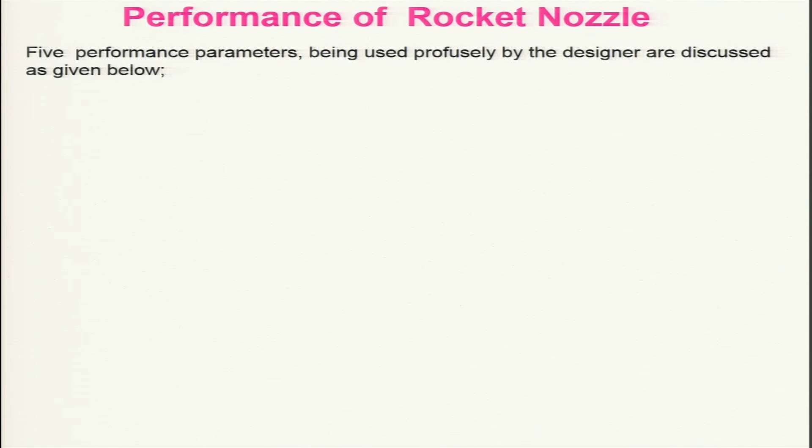Let us look at the performance of the rocket nozzles, because we need to see how good it is as compared to the ideal one. For that, 5 performance parameters are generally used by the designer: isentropic nozzle efficiency, discharge coefficient, mass flow coefficient, thrust coefficient effectiveness, and combustion efficiency.

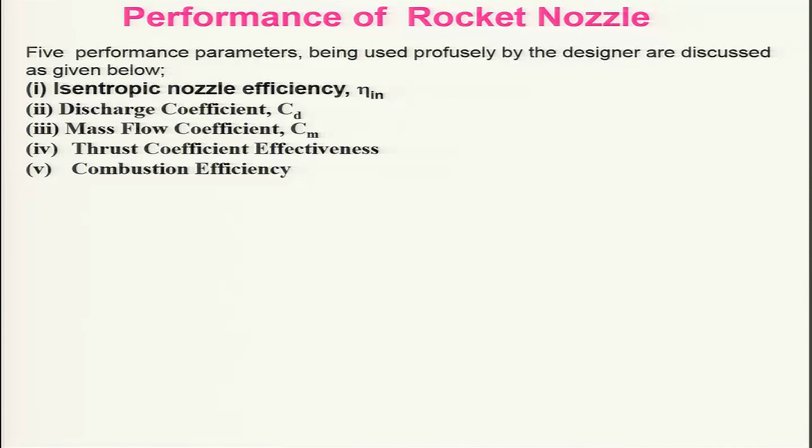Let us look at the expansion process in a TS diagram. When expansion is occurring in a nozzle, this is the ideal one and this is the actual one. You can see that this is the change in entropy, corresponding to actual. Therefore, we can define the nozzle efficiency as HT2 minus HE, the actual one for the pressure ratio PT2 by PE, divided by HT2 minus HES, the ideal corresponding enthalpy.

If I assume Cp to be constant, I can write down the isentropic efficiency as TT2 minus TE divided by TT2 minus TES. This is basically VE square divided by 2 over VES square divided by 2, and this is nothing but your isentropic efficiency.

This isentropic efficiency, as I told, I can write as VE square divided by 2, and taking Cp as constant, if I take TT2 out of the bracket, I will get Cp TT2 into 1 minus TES by TT2. Since this is isentropic flow, we can express that in terms of pressure ratio PE divided by PT2 to the power gamma minus 1 divided by gamma, and in place of Cp I can write gamma R divided by gamma minus 1, times TT2.

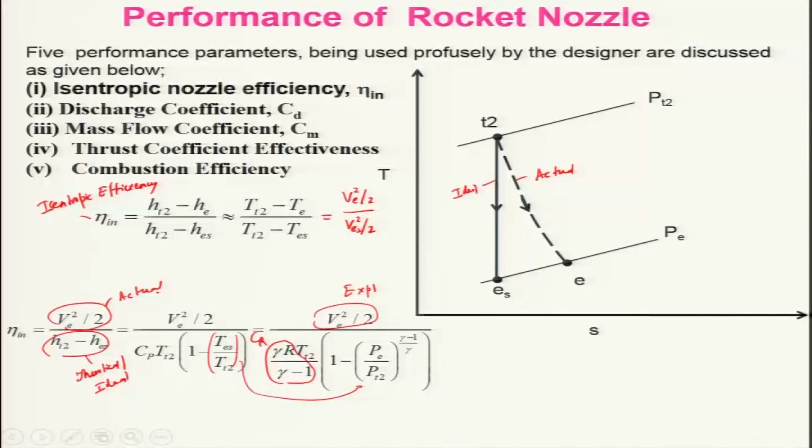From this I can get the actual value very easily from experiment, and I can calculate the theoretical one provided I know the pressure ratio PT2 by PE, the combustion chamber temperature TT2, and gamma. So this is the theoretical or ideal one, and this is your actual one, and these values will vary from about 0.9 to 0.98.

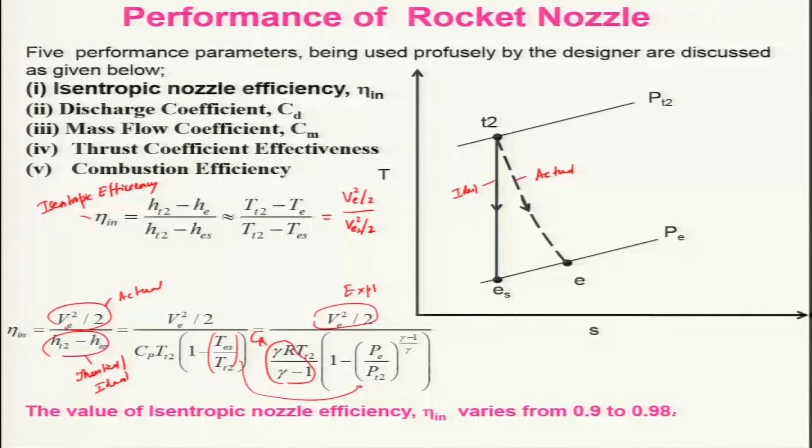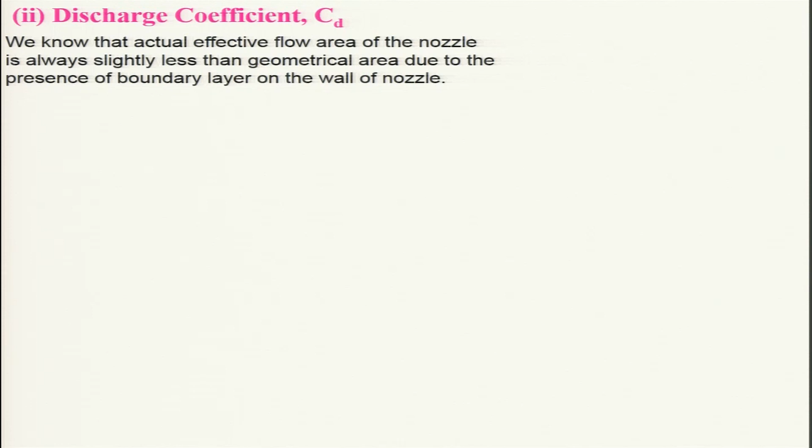Let us now look at discharge coefficient, which basically comes out due to the boundary layer effect and other things. The actual effective flow area of the nozzle is always slightly less than the geometric area due to the presence of boundary layer on the wall of the nozzle. Therefore, we define discharge coefficient as the actual mass flow rate divided by the ideal mass flow rate.

For mass flow rate, I can write rho E AE VE, the actual mass flow rate, divided by rho ES AE VES, where A remains the same, corresponding to isentropic flow without any boundary layers. So I can write this in terms of TES and VE over TE and VES, and the root term I can write as VE by VES, which is basically the efficiency I have defined. The discharge coefficient Cd depends on the Reynolds number and PT2 by PE.

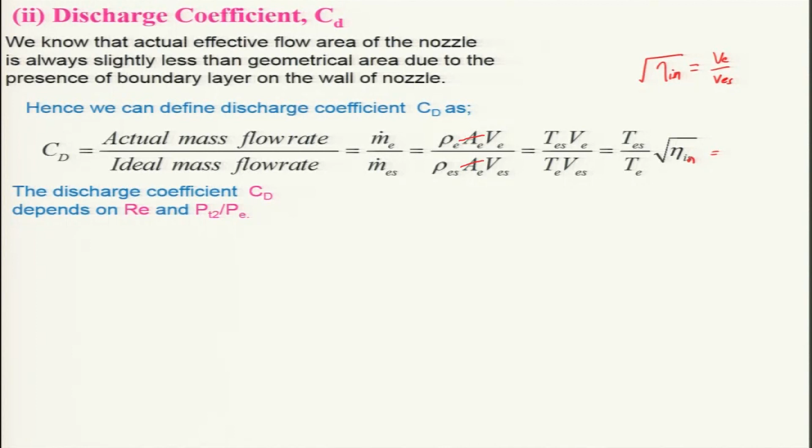If you plot Cd as a function of pressure ratio, you can see that in the subsonic flow it is not changing much due to the Venturi effects in the CD nozzle, and after that it goes on decreasing because VE will be different than VES because of losses, till it attains the choked flow condition.

And the mass flow coefficient C_m we have already defined, that is basically C_m is equal to m dot divided by P_c times A_t, and this you can get from the experiments and also theoretical values and find out how good it is. And mass flow coefficient, as I told, can be obtained from the experimental data and documented in the form of a design chart, so that it can be utilized and you can find out how good it is from the

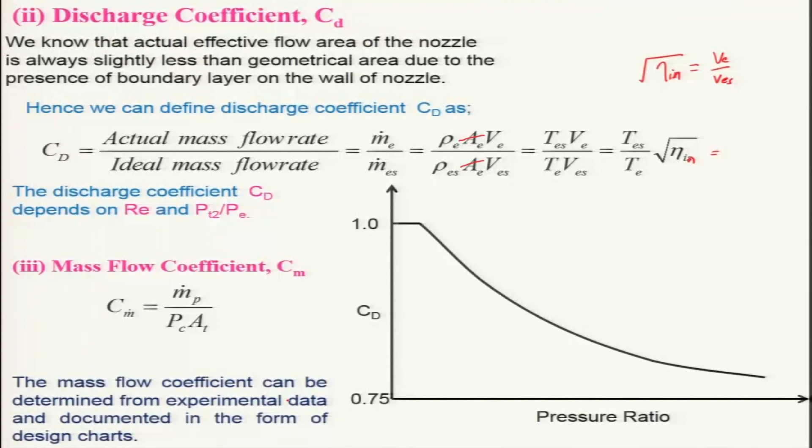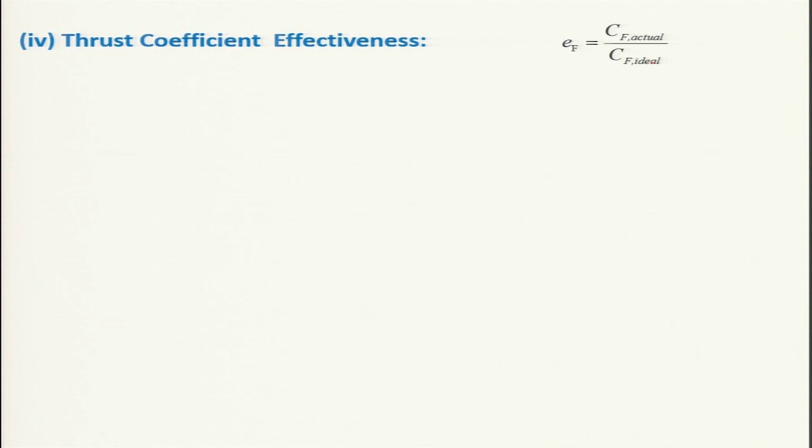ideal one. And we already discussed the thrust coefficient effectiveness, that is equal to the ratio of the actual thrust coefficient divided by the ideal thrust coefficient. The actual thrust coefficient you can find out from experiment by determining the thrust, the chamber pressure and the throat area, and the ideal one we can get from knowing the pressure ratio, gamma, area ratio and atmospheric pressure.

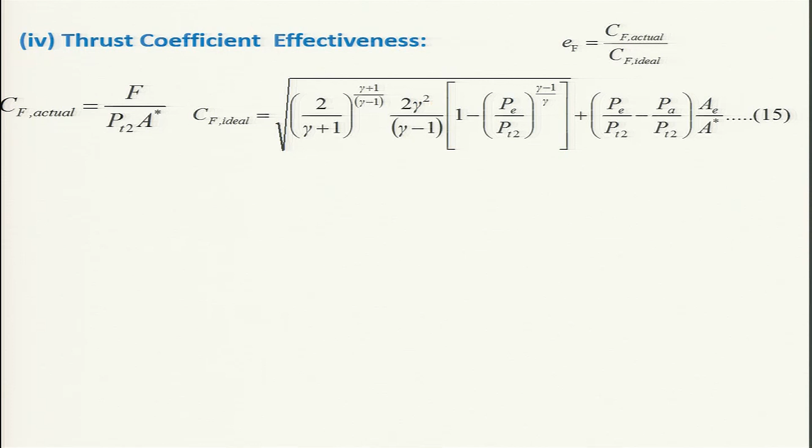We have already discussed this, and you can find that in actual practice the actual C_F is around 0.98 of the ideal value, but these values will vary; you can get E_F in the range of 0.92 to 0.98.

And another thing which is very much used, as I told earlier, is the combustion efficiency, which is the ratio of the actual characteristic velocity to the ideal characteristic velocity, and the actual characteristic velocity can be obtained by conducting an experiment measuring the mass flow rate of propellant, chamber pressure, and of course the throat area under choked condition.

And the ideal one you can estimate very easily by knowing the thrust chamber temperature, molecular weight, and also gamma, which you can get from equilibrium calculations. The combustion efficiency varies from around 0.95 to 0.99, and generally people always try to achieve a value of 0.99.

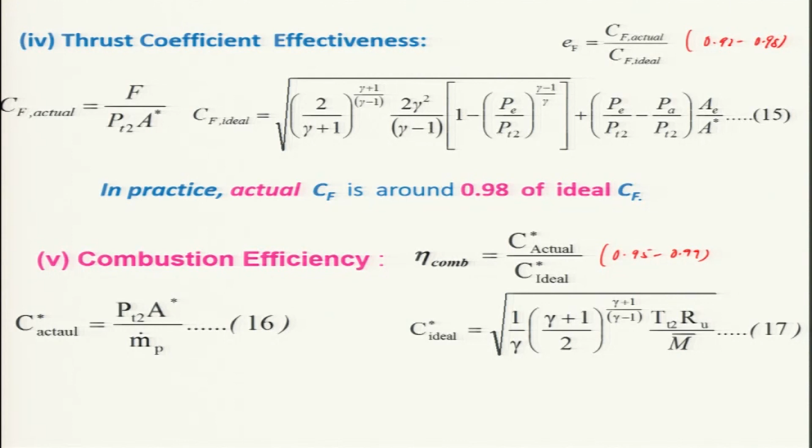So, these are the parameters which are used for evaluating the performance of the rocket nozzle engine, and we will be discussing how the exhaust nozzle velocity affects the flight performance of a rocket vehicle. A rocket vehicle is basically a vehicle propelled by a rocket engine. It can be a missile, a spacecraft, or any other vehicle which is propelled by the

rocket engine. So, when it is subjected to the thrust, it will be in motion provided it overcomes its own inertia, gravity, and several other forces acting on it. A question might come to your mind: what are the forces acting on a rocket vehicle during flight? Apart from the thrust exerted by the rocket nozzle, it will also experience the gravitational force, drag force, lift force, and even centrifugal and Coriolis forces, and the forces applied by the control surfaces.

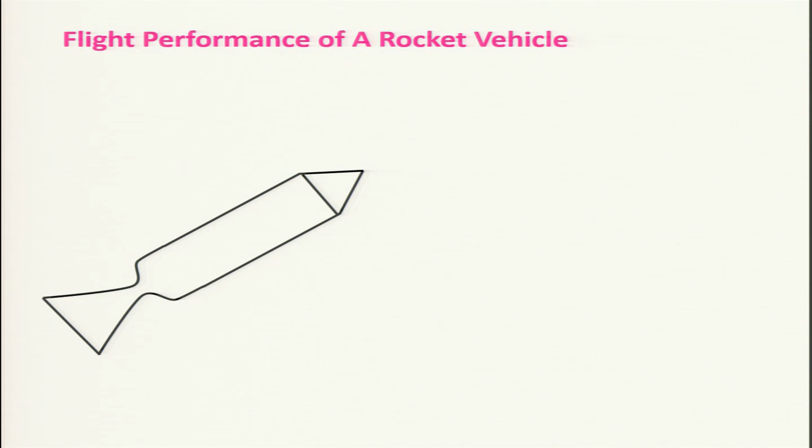And as a result, there will be moments, and the flight path of a rocket vehicle will be three-dimensional in nature. But for our present analysis, we will consider a two-dimensional plane in which a rocket engine is flying. Let us consider this is a rocket engine, and it is possible for it to fly in a two-dimensional or rectilinear plane provided no moment is acting on it. This is not realistic, but for simplicity we are considering it here.

And keep in mind that it has a center line passing through like that, making an angle theta here, and this is the CG of this rocket engine. And when the high pressure and high temperature gas from the burning of propellant is expanded through the nozzle, it will have a certain exit or exhaust velocity V_e, and it will produce

a thrust, and this thrust will propel the vehicle, provided it overcomes the drag force and the gravitational force; other forces we are not considering, being small. We are also considering the flight path to be in a plane, which is not possible, but for simplicity. So, the various forces acting here will make the vehicle move with a velocity v along the direction shown.

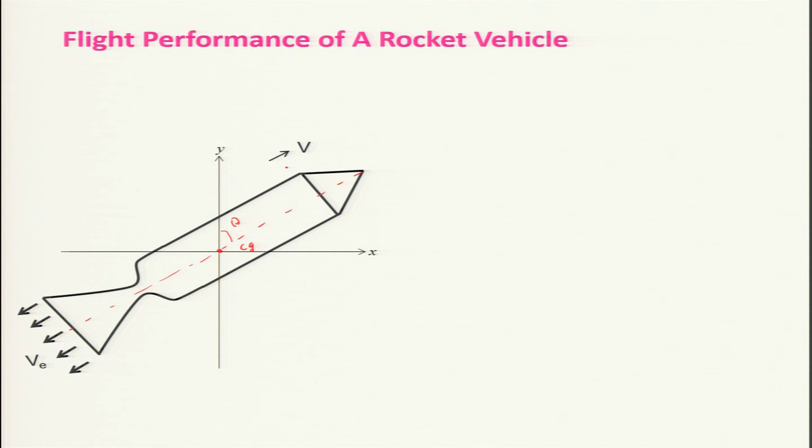So, let us see what forces are acting. As I told, we will consider the various forces like thrust, drag, and gravity. So, this is your thrust force which is acting, this is your drag force, and this is your gravitational force due to gravity.

And keep in mind, this is the angle theta, and this angle will become theta. So, we will be considering a force balance on this rocket vehicle along the axial direction, or rather along the direction of its motion. And keep in mind that during this, the mass of the vehicle will be reducing due to the consumption of the propellant, which will be expanded in the nozzle and move out of this rocket engine.

So, by considering a force balance, we can derive a rocket equation. Let us look at the force balance along the direction of its motion, or along the axis of this vehicle. Let m be the instantaneous mass of the vehicle, and it will be subjected to acceleration provided the thrust is overcoming the drag and the gravitational force.

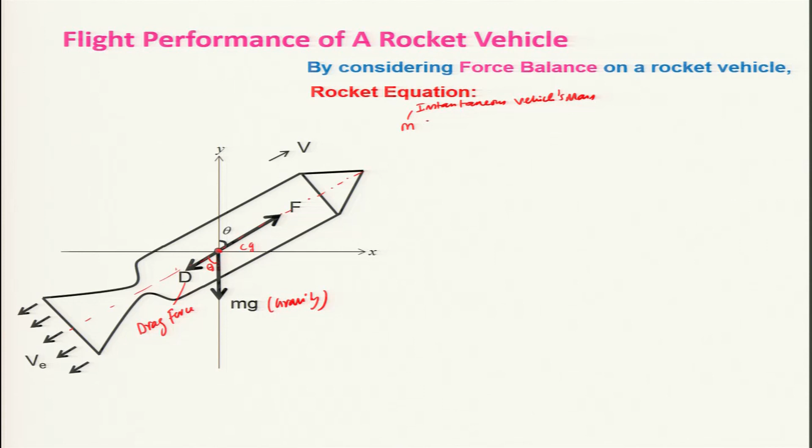Keep in mind that generally when it is taking a lift from the surface, the thrust force applied on a rocket engine will be at least 1.5 to 2 times the weight of the engine. That is the thumb rule, to have some tangible acceleration. And m dV by dt, the instantaneous mass of the vehicle into this acceleration, is equal to F minus the gravitational force along this axial direction, m g cos theta,

minus the drag force along the direction of the force. Keep in mind that the drag force can be of various forms: form drag, skin friction drag, base drag, but here we are considering the total drag due to the vehicle motion. This drag will be dependent on various parameters, namely the velocity of the vehicle, the surface area, and the density of the air through which it is moving.

And if you look at this gravity, this is g, the gravitational acceleration at any time. Keep in mind that with altitude the gravity will be changing, being maximum at sea level, and it goes on decreasing. And this is your thrust F, which we know is equal to ISP into g naught into the mass flow rate of propellant.